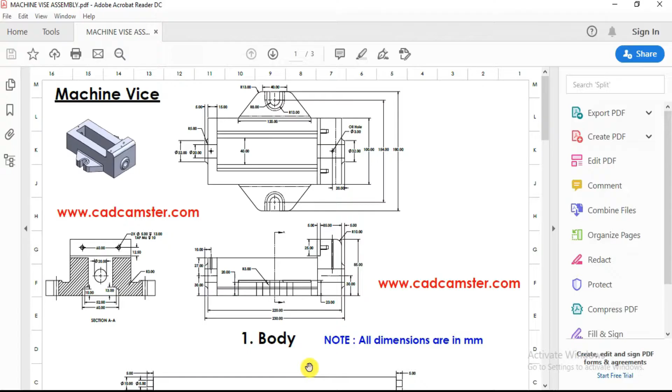Now first we will do some drawing reading. This is our first part, body, and this is the top view, and this is the front view, and this is the section view along this axis AA. First I'm going to start sketching from this front view, this profile, and I will extrude it up to a distance of 100 millimeters. Then I will make this cutout with the help of this section view at an offset distance of 15 mm up to this edge here.

After that I will create these holes, these fillets, these side flanges and these advanced holes with the help of the advanced hole tool in SolidWorks. And these two are the oil holes for lubrication. And there are threads. You can see tap thread of M6 up to a depth of 10 mm. So we will see how we can use the advanced hole command in this tutorial.

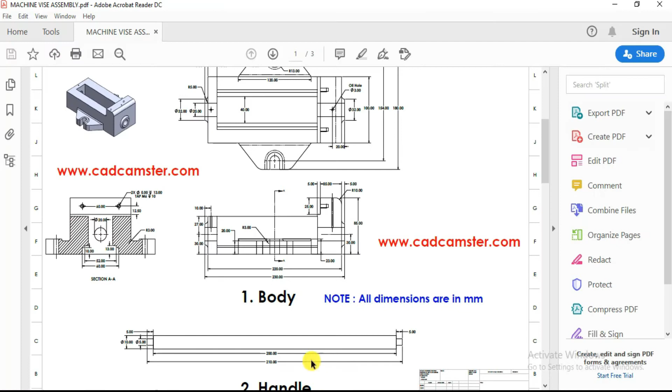Let me exit this assembly. Now go to File, select New. Now click Part, click OK. Now I will select units millimeter gram second and background plain white. Now first we will sketch our first part, which is body of the machine vise.

For that, let me hold on this front view. You can see all the dimensions very clearly. If you want to practice on your own, you can pause the video here and get all the dimensions. Now first I will select a plane to sketch. Select front plane and click normal. Now click sketch. Now select line command. You can also press the S key to get the shortcut line command.

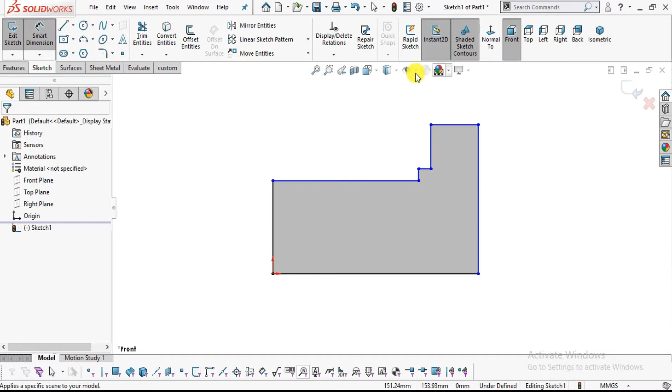Now I will sketch the profile, create one vertical line from here to here. Now one horizontal towards right. Now sketch this profile. Now vertical towards right and up to here. Now close this sketch like this. Now I will add some dimensions. Looks like it is not showing the constraints. Click here, view sketch relations. Now you can see all the constraints.

Now select smart dimension. This distance from here to here is 30 plus 27, which is 57. Select this edge, enter the value of 57 millimeters. This distance from top to bottom is 85 millimeters. Select this edge, enter 85 millimeters. This bottom base length is 220 millimeters. Select this edge, enter 220 millimeters, and from here to here it is 35.

Select this edge, enter the value of 35, and this edge length is 25 millimeters. Select this edge, enter 25. Now this edge here is 5 mm, so enter the value of 5 millimeters. Now click OK. Now you can see our sketch is fully defined.

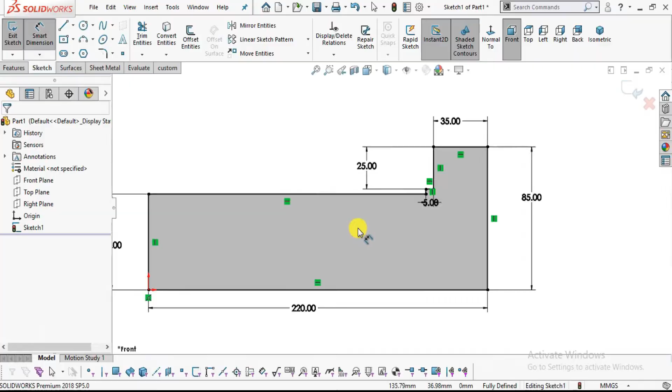Now I have to add one fillet here of radius 10 mm. Select the sketch fillet command, select these two edges, enter the value of 10 mm and click OK. Now we will use extrude command to extrude it, but make sure you extrude about the mid plane. So go to features tab, select extrude boss base and select mid plane.

Now, the extrude thickness can be seen from this top view. You can see here 100 mm is the thickness from here to here. Now enter the value of 100 millimeters. Now click here OK.

Like this. Now we have to make a cutout at an offset distance of 15 mm from this edge up to this edge. Now one more trick which I am going to tell you, which will be helpful for you to verify whether you are doing it in a wrong way or a right way, I mean your design approach. So you can use this hidden lines visible view to verify your approach or part at every stage.

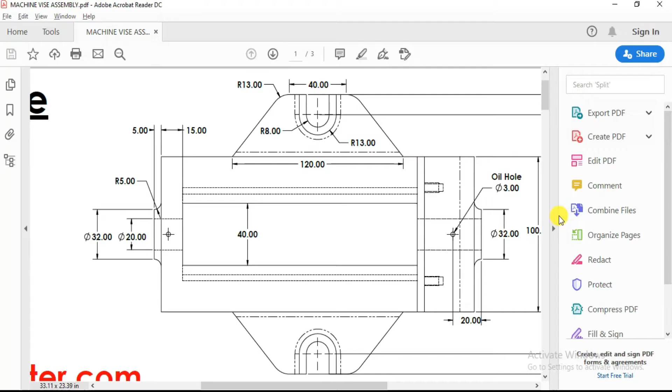Now you can see when I hover over my front view, we get the exact same profile which is shown here, which means you can double click on this and verify all your dimensions like this. Sorry, it will be 5. Yeah, it is 5. This is a very good way to approach your design. You can see like this. It is very helpful.

Now I will select this face, this one here, to make this cutout at an offset distance of 15 millimeters to this edge here. You can see this cutout is not beyond this edge, it is up to this edge. So for that I will select this edge, select this face and make it normal to.

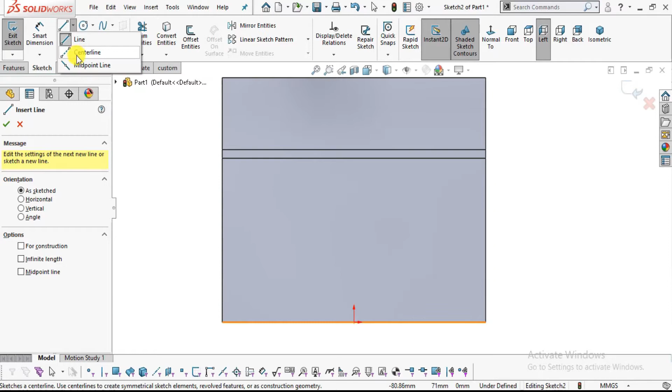Now select your sketch and select this face. Now I will sketch this profile here. For that select your line command. First create a center line. Now select your center line and create a center line at the mid portion like this. Now select the line command again. Now I will sketch this profile. You can see. Now create a line from here to here and up to this point, downward and towards the left, and like this.

Now I will assign some dimensions to it. Go to Smart Dimensions. You can see the full distance from here to here is 60. So from the center line it will be 30. Enter the value of 30 millimeters like this. And this height is 10 mm. Select this edge. Enter the value of 10 mm.

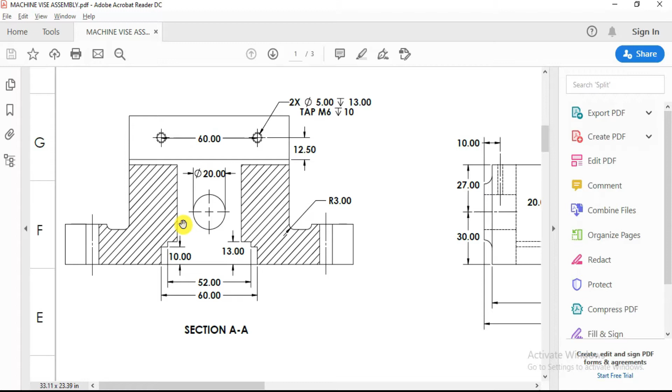And from here to here it is 13 mm. Like this. And this is 52 millimeters. So half will be 52 divided by 2, like this. Now we have to assign one more dimension, which is the gap of this portion.

For that let me go to the top view. You can see here the cutout gap thickness is 40 millimeters and it is at an offset distance from this plane which I am sketching on. So I will use an offset of 15 mm by extruding this sketch from this plane. And you can see this distance is 40 millimeters. So from center it will be 20. Now select this edge and the center line. This will be 20 millimeters.

Now if you want to assign these dimensions as diameter, let me delete this. You can do it another way. Suppose I know the whole distance is 40 millimeters and I want to dimension it as 40 millimeters. For that select this edge and select the center line and move your cursor towards the other side of the center line like this. Now you can see it is showing the whole distance, 40. Now you can set it as 40. This is a very good feature of SolidWorks.

Now I am going to mirror this profile along this center line axis. For that select mirror entities and select all these entities like this. Drag and select all these. Now the mirror axis will be this, and click OK. Now you can see.

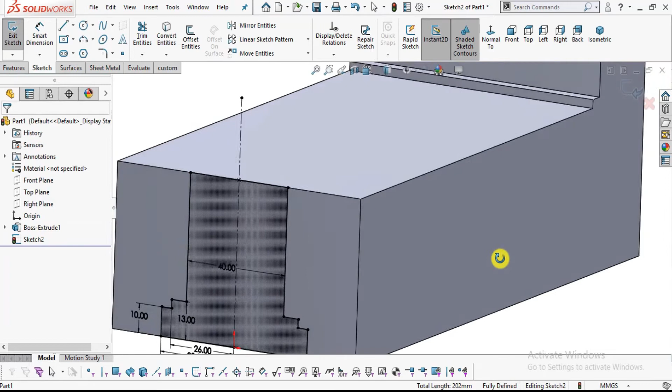Now I am going to use extrude cut, but I will enter an offset distance of 15 mm because you can see from this top view this cut is at an offset distance of 15 millimeters from this surface which I am sketching on.

Now go to features, select your extrude cut, and instead of selecting from sketch plane I will select offset and enter the value of 15 mm. Now direction will be opposite like this. You can see now our cut is starting from an offset of 15 mm from this surface, and select here up to vertex and select this edge.

Sorry, let me choose here blind and select here up to surface and select the surface like this. You can see the preview. Now click here OK. Now we have got our desired cut. You can see, as we wanted. Now we will create these holes,

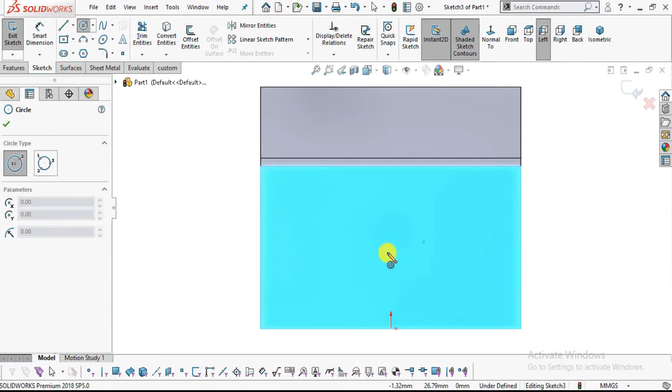extruded cylinders of thickness 5 mm, which is mentioned here. Now for that I will select this face again, normal to, and sketch. Now select a circle command, create a circle like this, and add one constraint. Select the center of the circle and hold down the control key and select this origin. Make them vertical.

Now you can see the center axis, and from the base it is 30 millimeters. So go to smart dimension and its dia is 32 millimeters, which can be seen from here. So select this circle, enter the value of 32 millimeters, and from base it is 30 millimeters. So select the center, select this origin, and enter the value of 30 millimeters like this. Now go to features.

Now I will extrude it up to a distance of 5 millimeters. Sorry, let me sketch one more circle. You can see 20 millimeters dia. Go to circle command, select this point, create a circle. Now enter the value of 20 millimeters dia, which is mentioned here like this.

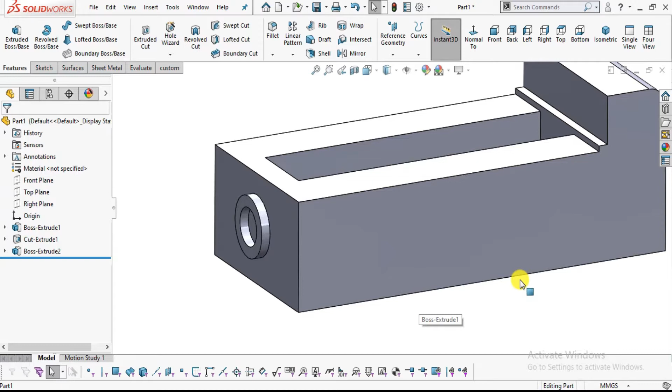Now go to features, select extrude, and enter the value of 5 millimeters like this, because here it is mentioned the thickness is 5 mm on both sides. Now click here OK. Now I will sketch on this plane. You can mirror it, but I will sketch.

Again, select your circle, create two circles. Now add one constraint, control select these 2 points, make them vertical, go to smart dimension, select this one, enter the value of 32 millimeters, and select this inner circle. Its dia is 20 millimeters, and the center distance from the base is 30, like this.

Now go to extrude, enter the value of 5 millimeters, and direction will be this left. Now click here OK. Now this is hollow, so I will expand this sketch and make this sketch visible. Now I will select here extrude cut, select this inner circle only, and select here through all both, because we want the cut through all the body. Now click here OK.

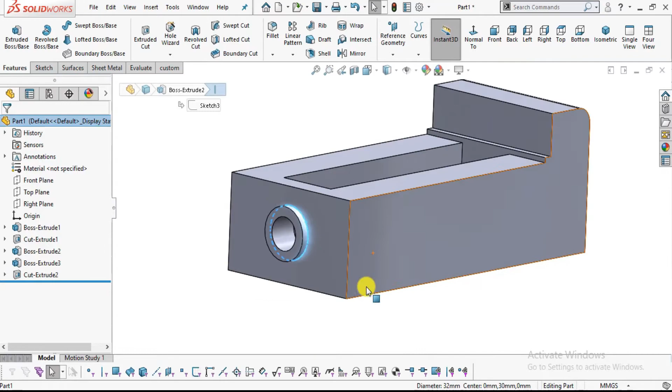Now let me hide this sketch like this. Now you can see this hole is through all length of this part. Now I will fillet these edges. Let me go through the drawing. You can see fillet is of radius 5 millimeters. Now go to fillet, enter the value of 5 mm. Now select these two edges, this one and this one, like this.

Now click here OK. Now you can see we have created these cylindrical extrudes of thickness 5 mm. Now I will create these two oil holes of dia 3 millimeters. Now I will select this face, normal to, and sketch, and sketch one circle here. Now go to smart dimension, select this circle, enter the dia of 3 mm like this. Now you can see it is at the mid.

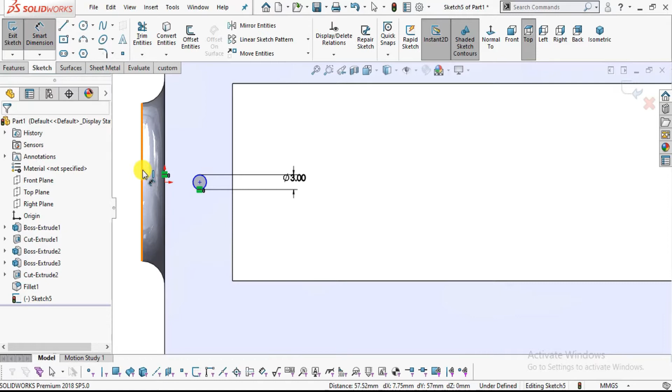So let me add one constraint. Select this origin point, hold down the control key and select this center point. Make them horizontal. And from this edge to the center line of this, it is 10 mm. Now go to Smart Dimension, select this edge, select the center point, and enter the value of 10 mm like this.

Now go to Features, select your Extrude Cut, and this cut is up to this cutout of the cylinder. Now I will simply drag it up so that it is through all this surface, this one. Now click here OK. Now you can see the cutout here.

Now I will sketch on this face, normal to and sketch. Now I will sketch this oil hole here, which is at a distance of 20 millimeters from the edge of this extruded cylindrical flange, and its dia is same. So select Circle command and create a circle. Go to Smart Dimension, select the circle, enter the value of 3 mm.

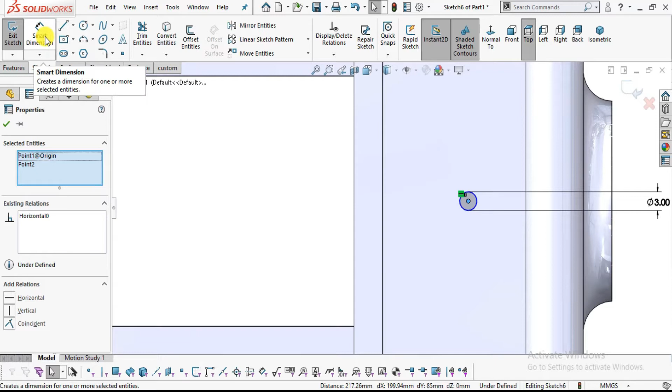Now make one relation. Let me exit the Smart Dimension command. Now select this origin and Control select this center point and make them horizontal. Now go to Smart Dimension, select the center point and select this edge. You can see the distance is 20 millimeters. Enter the value of 20 millimeters.

Now click here OK. Now go to Features, select here Extrude Cut, and in the same way I will simply drag this handle up to the mid portion of this cutout like this. Okay, you can see it is up to this. Now these are the oil holes.

Now in the next step I am going to create these 2 holes, which you can see are the tap holes, and I am going to create cosmetic threads in these tap holes of M6, meaning diameter is 6, and these have internal threads.

So let me go to the part. Now select this face and normal to it like this. Now select here hole wizard. Now select here straight tap. Now standard will be ANSI Metric and type will be tapped hole.

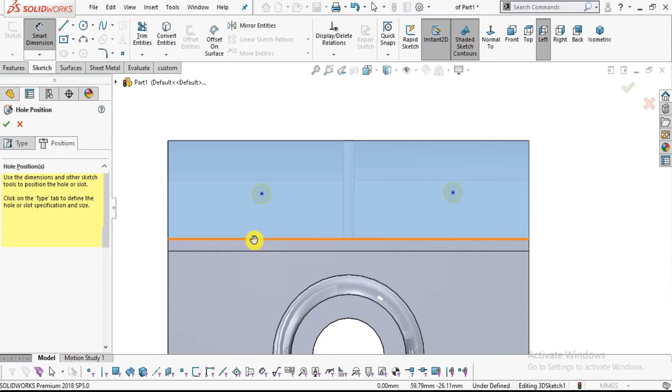Let me zoom in. You can see center distance from this edge is 12.5 millimeters. So select this edge, center point, and select this edge. This distance is 12.5. Same as here. Select the center point, select this edge. This will be 12.5.

Now center to center distance is 60 millimeters. Select these 2 centers, enter the value of 60 mm like this. Now this whole distance is, you can see, 100 mm. So from here to here it is 20. Equidistance like this. Now this will be automatically 20. Now I will click here OK.

Now you can see this is a dotted circular line. This is a symbol of cosmetic thread. Now it is not showing cosmetic thread because in the settings it is turned off. Now go to settings, document properties and detailing. Now select here shaded cosmetic threads, click here OK. Now you can see it is showing the thread.

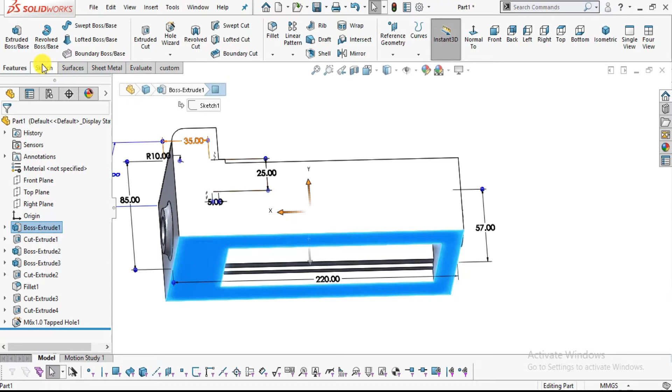Now in the next step I am going to create these flanges. I will create only one flange and mirror it to another side. Now for that, select this face and sketch on this face, but I will view from this top face. Now select this top face as normal like this.

Now create one center line. Let me snap it. You can simply create line, select line command, and first select here circle command and create one inner circle of dia 16 mm because radius is 8 mm like this, and dimension it 16 mm.

Now select a line command and create one vertical line. Again select a line command like this. Now select a line command again and sketch like this. Later on I will add the fillets. Close this sketch like this.

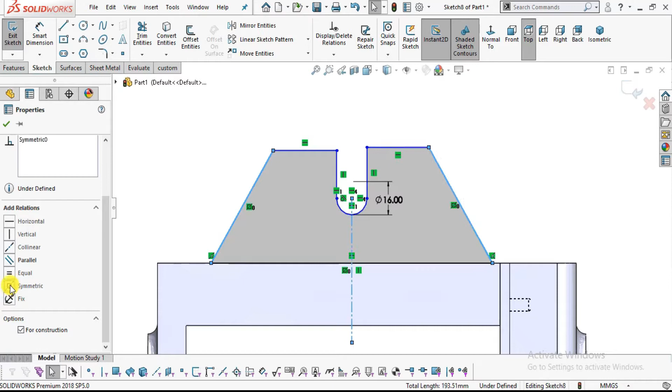Now create one center line from this center in the downward direction like this. Now go to trim entities and trim this portion. Now I want these lines to be symmetric, so select this line, control select these two lines and make them symmetric like this, and again select these three lines, control select these three lines and make them symmetric so that it don't move.

Now I will dimension it. You can see there is a fillet. Now I will add here fillets. Enter the value of 13 mm radius because here the radius is 13 millimeters, and select this edge, this corner and this corner and click here OK.

Now I will assign some dimension. Go to smart dimension. From here to here it is 40 millimeters where these arc ends, and the value of 40 millimeters like this, and this whole distance is 120 millimeters, and from here to here it will be automatically 60 because I have added one symmetrical relationship.

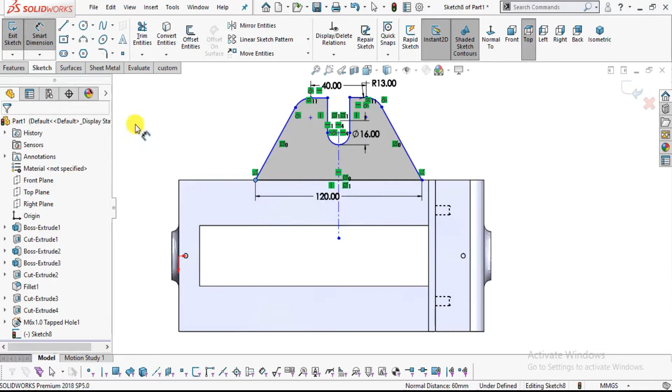Now you can see from center to this center it is 154. So from this origin or mid axis it will be 154 divided by 2, same as here the top edges are at 180 millimeters apart, so the mid axis or the origin axis it will be 90 millimeter apart. So select this center point and select this origin point which is at the mid of this. Let me select it again. Select these 2 points. Now this will be 154 divided by 2.

Now select this edge. Let me make these two collinear, vertical, horizontal, so that they don't move. Now select this edge and select this origin point, and this will be 180 divided by 2. Enter the value of 180 divided by 2 like this.

You can see this whole distance is 230 millimeters, and this center circle will be at the mid. So go to smart dimension, select this edge and select this center point. Enter the value of 230 divided by 2 like this. Now you can see the preview.

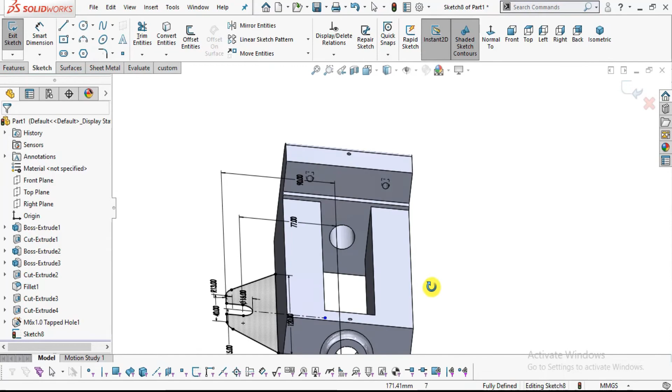Now we'll extrude it to a thickness of 20 millimeters from the front view. Go to feature, select extrude boss base. Direction will be opposite and thickness will be 20. Now click OK.

Now select this face again and sketch. Select offset entities. First select convert entities and convert these edges into a sketch. Let me select this edge. You can see. Now go to offset entities.

You can see the radius of the outer one is 13, so this thickness for offset is 5 mm, 13 minus 8. Enter the value of 5 mm and select these edges. You can see it has automatically selected all of them because I have checked select chain. Now click OK.

I will close these edges. Select the line command and connect these two points with a line. Now go to feature, select extrude boss base and select this region. Drag this point to here to make them coincident. Now you can see it is shaded, meaning this is a closed sketch now.

Now go to extrude, select this profile. It is automatically selected. Now its thickness is 3 mm because from here to here it is 20 and this is 23, so its thickness is 3 mm.

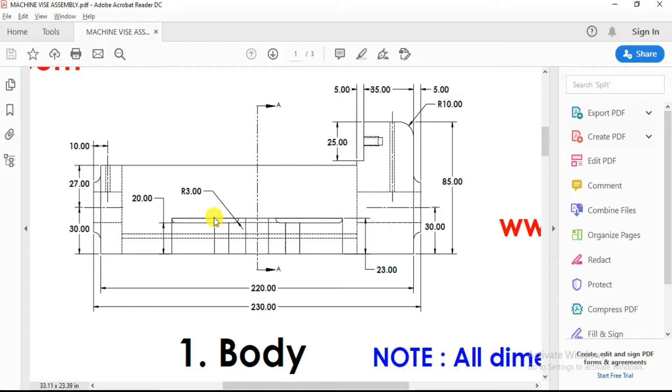Now click OK. Now there is a fillet on these two edges, this one and this one. You can see the fillet is 3 mm at this edge. Now go to fillet, select this edge and enter the value of 3 mm.

Now click OK. Again go to fillet. You can see there is a fillet of 3 mm here also. Now select this edge and make sure you select tangent propagation so that it selects all the edges tangent to the selected edge.

Now click OK. Now we will mirror this profile along this front plane. Select mirror. I will select this extrude, this fillet, this one and this one. You can see it is showing the preview. Now click here.

Unable to create instances. So let me first select the base, this one and this one. Now I will fillet these two, both of them are 3 mm. Now click OK. You can see we have successfully created our first part, which is the body.

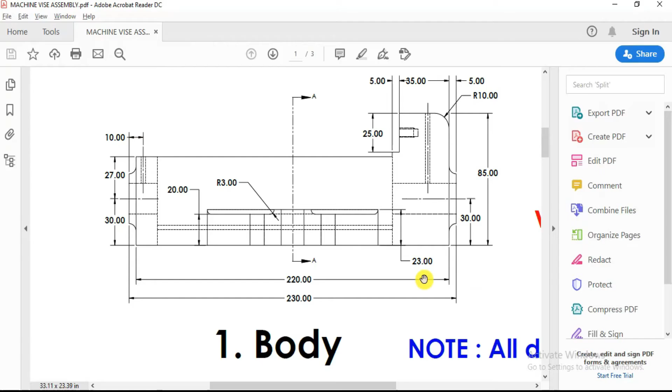In the next step we will create our second part, which is this handle. You can see the drawing of our second part is here.

Now there are two ways to create this part. Either you can use the extrude command with several step extrudes to create this profile, or you can simply create this half profile along the mid axis and then use the revolve command to create the whole profile. Now I'm going to use the second approach using the revolve command.

First I'm going to create a construction line, a horizontal construction line of length 210 millimeters. Then I will create this half profile and use the revolve command, and our revolve axis will be that center line which we have created of length 210 millimeters.

Now let's get back to the software screen. Go to file, select new. Select part and OK. Now select millimeter gram second and select this background to plain white.

Now select this front plane, normal to, and sketch. Select center line and create a center line of length 210 millimeters. Now go to Smart Dimension, select this center line and enter the value of 210 millimeters.

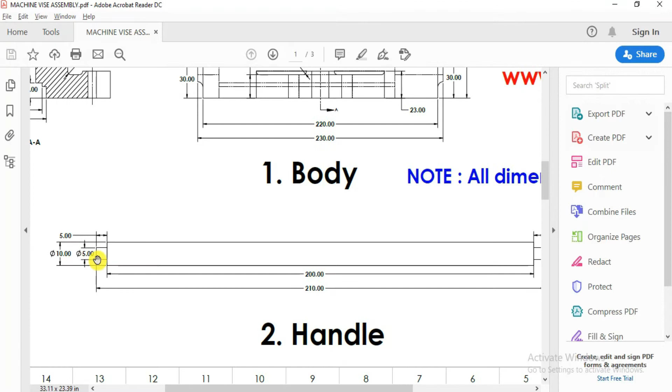Now we have to create this half profile. First we will move 2.5 mm upward, then 5 mm towards right, then 2.5 mm upward again, then 200 mm up to here, then 2.5 mm downward, then 5 mm towards right, then 2.5 mm downward.

So let's sketch this. Select the line command, create a vertical line in upward direction of length 2.5 mm since the hole is 5 mm so half will be 2.5 mm, then 5 mm towards right, again 2.5 mm, now 200 mm like this, then these two will be collinear or horizontal. Sorry, let me select it again.

Like this. Now I will add some constraints. Select this line and make them horizontal. Or you can simply select these 2 points and make them horizontal like this so that they don't move.

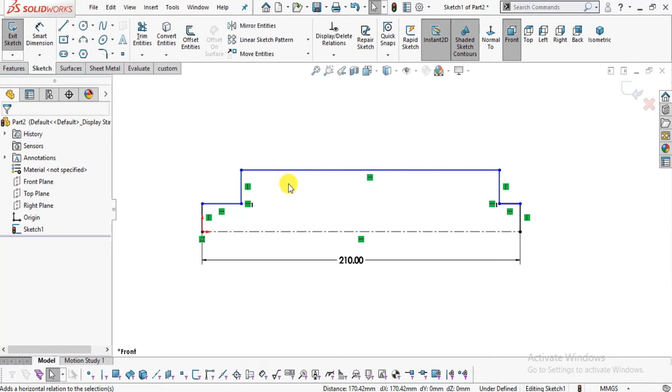Now I will assign some dimensions. Go to Smart Dimensions. Now select this. You can see its whole diameter is 5 mm. So half will be 5 divided by 2, which is 2.5 mm. So this edge length will be 2.5 millimeters like this, and this will be 5 mm here.

Select this edge, enter the value of 5 mm like this. Now this will be 200 from here to here. Select this edge, enter the value of 200 millimeters like this. Again select this one, this will be 2.5 millimeters like this. Now you can see our sketch is fully defined.

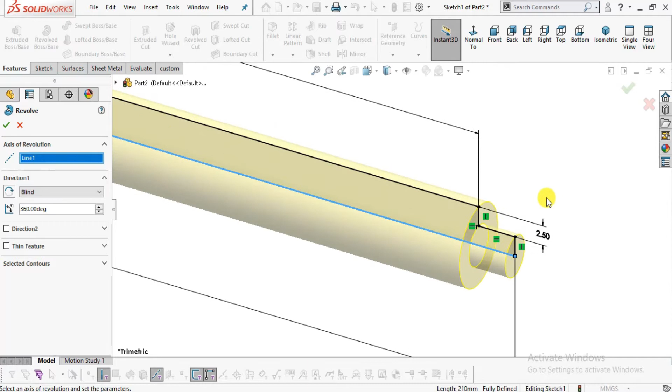Now we will use the revolve command, but before using it, select this center line and uncheck construction geometry, because when you use revolve command it will show open geometry otherwise. Now select here revolve command. Now select this axis like this. You can see it is showing the preview. Now click OK. This is our second part, handle.

Now in the next step we will create our third part. Our third part is jaw. We will create it in the next step. Now we will create our third part, which is jaw. This is the drawing of our third part, jaw.

First I will create this rectangle of length 100 mm and width and height 28 mm. Then I will extrude it up to a thickness of 8 mm. Then you can see here there are two holes which are actually countersunk holes. This symbol of V shows that these holes are countersunk, and the outer hole is of diameter 12 mm and the inner one is 6.3 millimeters, and these two holes go through all this thickness.

So first I will select here part, new, and OK. Now select here millimeter gram second and plain white. Now select here front plane, normal to, and sketch. Now select your center rectangle, snap this point, origin point, and create a rectangle.

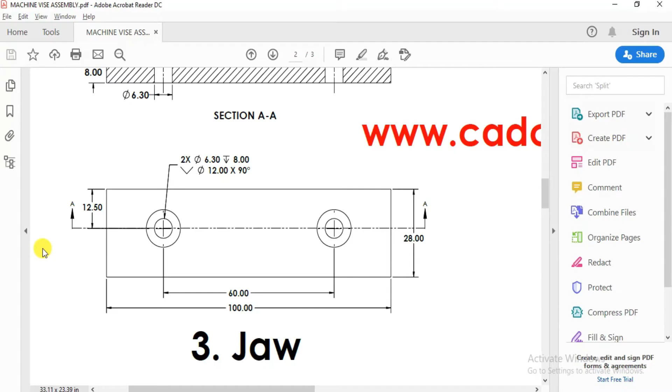Now I have to assign dimensions. You can see this 20 mm diameter is this diameter, but we have this diameter as 6.3. Enter the value of 6.3. Depth will be hole 8 mm and angle is 90 degree. Enter the value of 90 degree and double click on this diameter. Countersink diameter is 12 mm.

Now go to positions, select 3D sketch and create 2 like this. Now go to Smart Dimension. Now you can see center to center distance is 60. And from this side this hole is 100 and this is 60, meaning from here to left it is 20. So this will be automatically 20.

And from base it is 28 divided by 2 because it is at the middle. Or you can see here, sorry, it is not at the middle, it is 12.5 mm from the top, which is mentioned here. Select these center and these. Enter the value of 12.5. Now select the center point and select this top edge. Enter the value of 12.5 like this.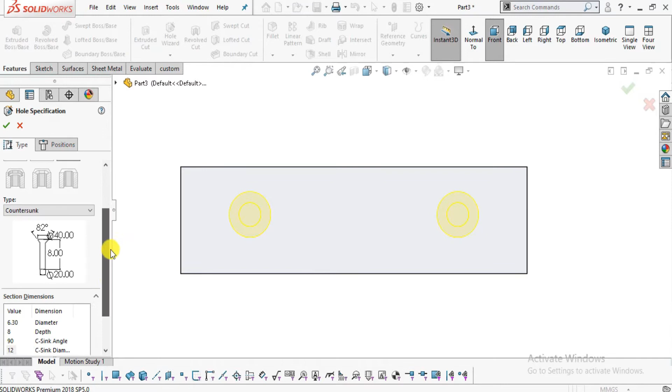Let me verify these dimensions again. Yes. Now click here OK. Now you can see we have created this.

Now if you want to verify, you can select this top plane and section view. Now you can see it is exactly same as this section view. Now let me exit the section view. Now this is our third part. Save it, which is jaw.

In the next step we will create our next part, which is movable jaw, this one. Now we will design our next part, which is part number 4, movable jaw. Now this is the drawing of our part number 4.

You can see this is the front view, this is the side view, and this is the bottom view, not the top view. And you can see there are threads, tap threads into these two holes, this one, and these two bottom ones. All the dimensions are mentioned here.

Now we will start creating from this front view. We will first create this front view, then we will create these fillets, or you can say we will create this sketch and use extrude cut to make this profile, and at last we will create these holes. So let's get started.

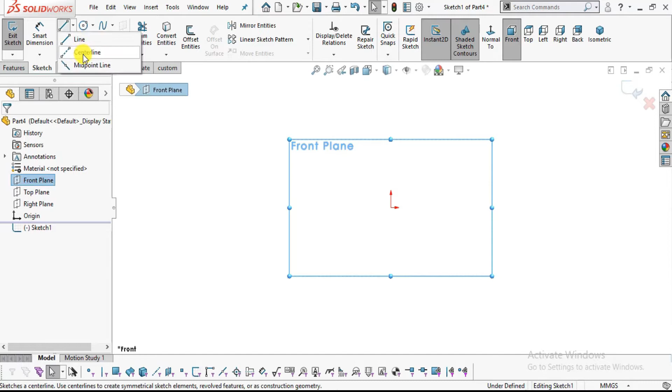Go to file, select new, select part and OK. Now select millimeter gram second and select plain white. Now select front plane, click normal to and sketch. Now select center line. I will create only half profile, the other half I will mirror.

Now create a center line like this. Now the length of the center line will be 25 plus 3 mm, which is 28, plus 45. This whole length will be 28 plus 45. Go to smart dimension, select the center line. This will be 28 plus 45, 73.

Now go to line command and create this half T profile like this. Now go to smart dimension. Now this one will be 25 because the whole distance is 50. If you want to dimension it by 50, you can also do that. For that, let me delete this.

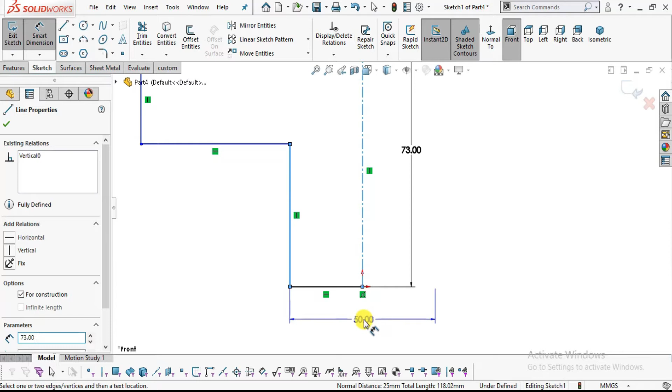Now go to smart dimension, select this edge and move your cursor towards the other side of the center line like this. You can see it is showing the whole distance. This will be 50. Now this distance will also be 50. From here it will be 50, but I want it to show the whole distance, 100, like this.

Now this distance will be 30 because this whole distance is 100 and this is 40. So the sum of these two will be 60, so each of them will be 30 millimeters. Now select this one. Sorry, this height. Sorry, this is not 50, this is 40 like this, because its extrude distance will be 50 mm.

Now this height will be 45 from here to here. Now select this one and this one. This will be 45 like this. Now go to mirror command and drag and select these entities like this. Now select the mirror axis like this.

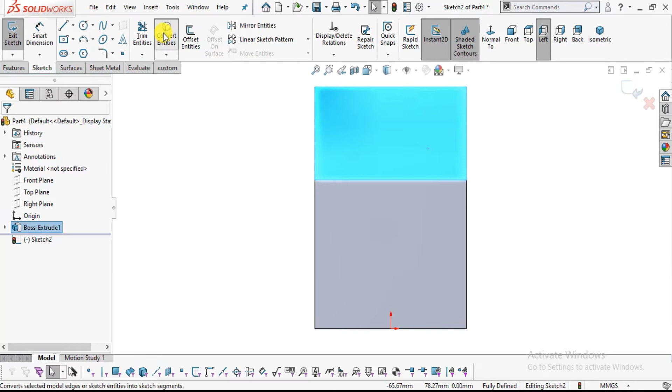For that I will sketch on this face. Select this face, normal to and sketch. Now select this face again and convert entities like this. Now select your line command and create a profile like this. You can see this is our profile. I have to create one more profile like this.

Now select your fillet and create two fillets here and here. Here it is 3 mm and here it is of radius 10 mm. So enter the value of 3 mm, select this corner, and select this corner, enter the value of 10 mm and select these two corners like this. Sorry, let me delete this relation. Now I will fillet it later. Now I will assign some dimensions.

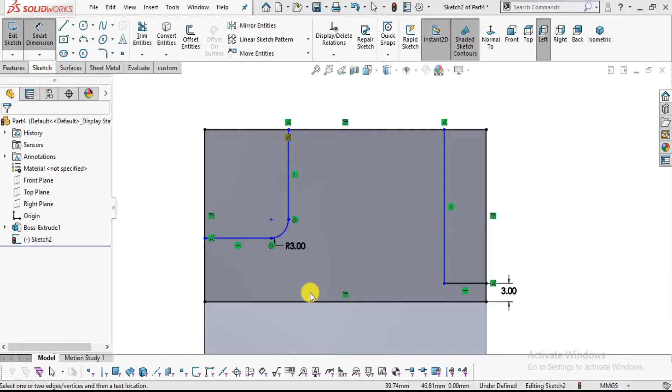Go to smart dimension. Here you can see it is 10 mm from this edge. This will be 3. Select these two edges, this will be 3 mm. Now from here to this edge, this will be 10 mm. And from this to this edge, this will be 25.

Now from here to this edge, this will be 35. Enter the value of 35 like this. Let me drag this like this. Now this will be 5 mm. Go to smart dimension, enter the value of 5 mm. Now go to features, select extrude cut, select these two regions, select through all both and click OK.

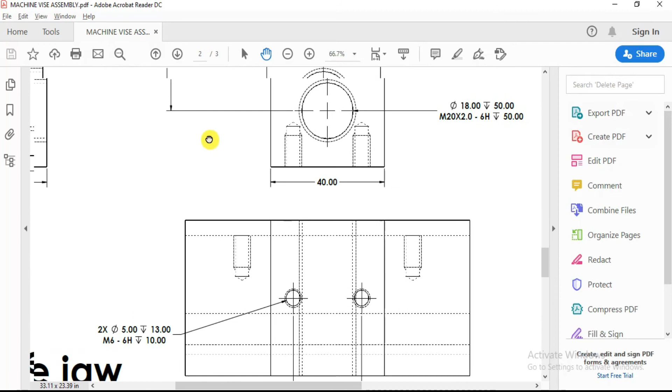Now you can see we have to make one more fillet. Go to fillet, enter the value of 10 mm and select this edge like this. Now if we switch back to normal to this view, you can see this is our required profile of the side view. Now we have to create some holes. For that, first I will create these internal threads. Select this face, normal to, and you can create a hole.

Now first we will create this hole of 18 mm dia up to 50 mm, and 6H is the tolerance of the fit. Now select hole wizard and select legacy hole and simple hole. Now enter the depth value of 50 mm and the diameter will be 18. Double click, edit and enter the value of 18 mm. Now go to position, select 3D sketch and position it like this.

Now smart dimension. From this edge up to this center, this will be 20 because the whole distance is 40. Now from this edge it is 27. Select this center and this edge, this will be 27 like this. Now click OK. You can see. Now select thread.

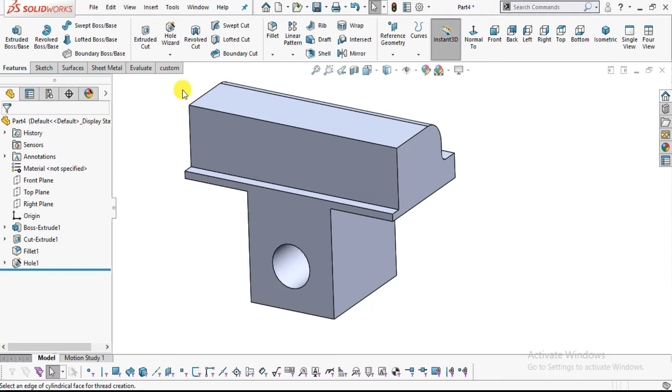Now thread location will be this edge, and starting face will be, let me select this face, and it will be blind, or enter the value of 50 mm like this. Now select here

metric tab, and thread type will be, size will be M20 x 2, which is mentioned in the drawing. You can see the preview like this, and select your right hand side thread and click here OK. Now we have created the thread.

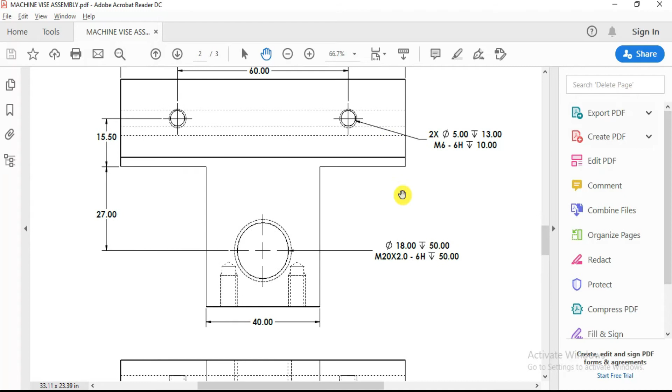Now I will create these holes, but in these holes there is also a thread, but I am not going to use the actual cut thread. For these holes I am going to use the cosmetic thread. Now select this face and normal to. Now go to here hole wizard and select here straight tap. Now select here ISO metric tap hole.

Now we have to specify the size of the hole. You can see the size is M6. Select here M6 and pitch will be 1 mm. Now it is asking for the hole depth. You can see this hole depth is 13 mm and the thread depth is 10 mm. So this will be 13 and this will be 10.

Now select here cosmetic thread and uncheck this near side countersink and check here with thread callout. Now go to position, select 3D sketch and position them. Now we have to specify the location. Go to smart dimension. You can see from this edge here, this is 15.5 like this. Again select this center, select this edge. This will be 15.5.

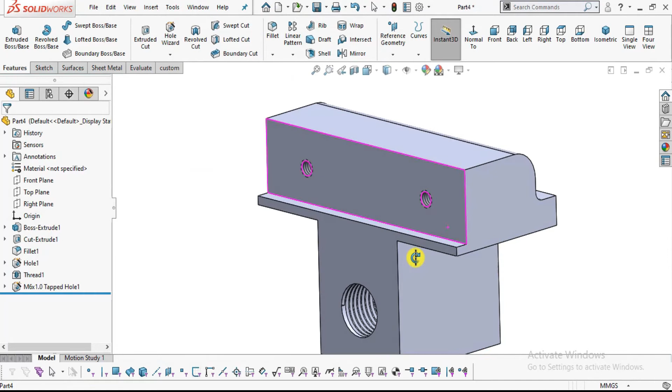Now let me do some settings so that we can see the cosmetic thread. Now click here shaded cosmetic. Now you can see the thread here, cosmetic thread. Now in the same way we have to create holes at the bottom. Normal to.

Now go to again hole wizard, select here straight tap and ISO metric tapped hole, and size will be the same M6, and dimensions all of them are same. Sorry, this hole depth will be 13 and this will be 10. Looks like in the previous one I have entered 15. First I will get this one, then later on I will check the previous one. Now these are the end conditions. Uncheck this thread class. Now select your position, 3D sketch and position them like this.

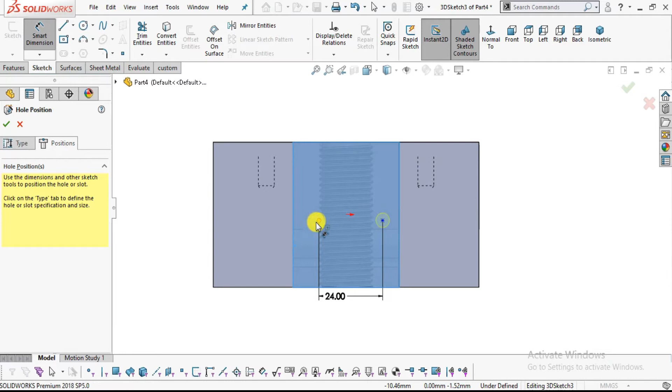Now go to smart dimension. From center to center it is 24 and hole distance is here 40. So from here to this one, it will be 8 mm from these two edges. Select this edge and this one, this will be 8 mm. So this will be automatically 8 mm.

Now we have to specify from the top edge or bottom edge. Now you can see this will be 50, so it will be at the middle. So from top edge this will be 25. Again select this top edge, sorry, let me edit this. Go to smart dimension, select this one and this one. Looks like it is not snapping the top edge, it is snapping it in a wrong way. Snap this 25. Now it is fully defined.

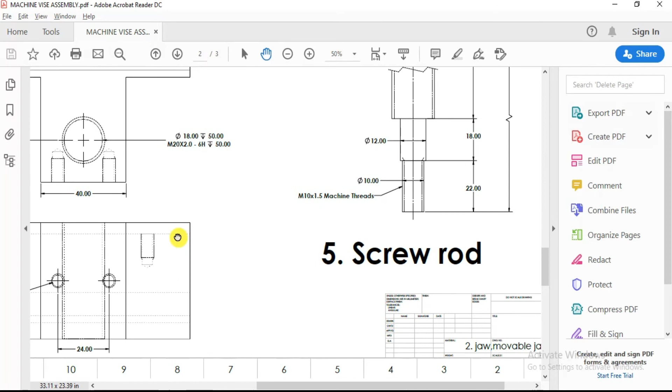Now click here OK. You can see our threads are made, cosmetic threads. Now this fourth part, movable jaw, is ready. Now in the next step we will create our next part, which is this screw rod.

Now we will draw our next part, which is part number 5, screw rod, with the help of this drawing. You can use two approaches. You can either use extrude command or you can use revolve command. I am going to use extrude command. So let's get started. First select here file, select here part and click here OK. Now select here millimeter gram second and set background to plain white.

Now select here sketch and front plane to sketch and sketch circles. Let me check this option, sketch numeric input. Now what will this do?

Now you can see when I make this option visible, now if I draw anything, you can see boxes appear. So this helps the user to enter the value dynamically while sketching. So it saves a lot of time

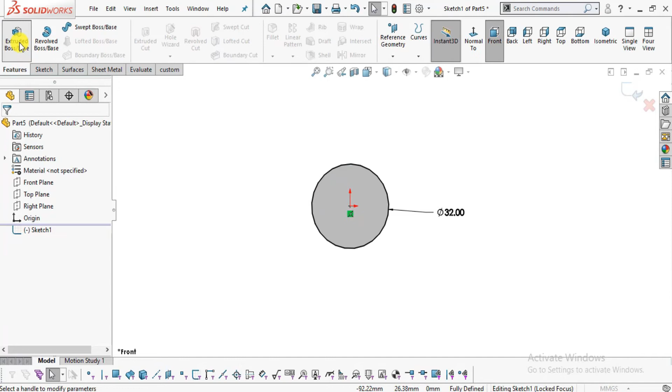of dimensioning the sketches. Now go to circle command, select circle, snap this point and create a circle of diameter 32 mm and extrude it up to a distance of 40 mm. Now enter the value of 32 mm like this. Now go to feature, select extrude and extrude up to 40 millimeters like this.

Now select this face again, normal to and sketch, select circle command again. Now create a circle of dia 20 millimeters and extrude up to a distance of, you can see, 170 plus 40, 210 mm. Go to feature, select extrude and enter the value of 40 plus 170, 210 mm. Now click here OK.

Now again select this face, sketch, select circle command and create a circle of dia 12 mm and extrude it up to a distance of 18 millimeters. Now enter the value of 12 mm. Now go to feature, select here extrude boss base and enter the value of 18 millimeters like this.

Now again select this face, sketch, circle command. Now the dia will be 10 mm and the extrude depth will be 22 mm. Diameter is 10, enter the value of 10 mm. Now go to features, select here extrude boss base and enter the value of 22 millimeters like this. Now click here OK.

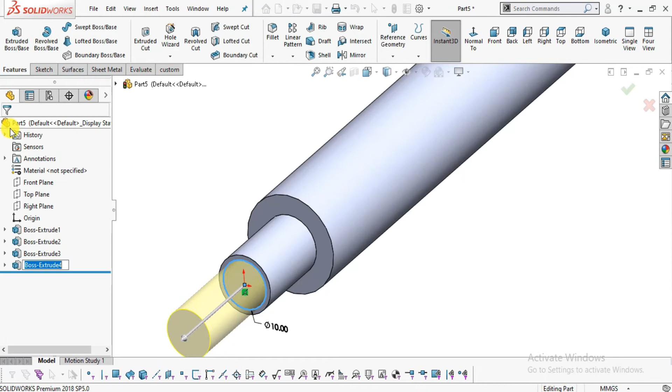Now we will create one fillet on this edge of radius 3 mm. Now go to fillet, select this edge and enter the value of 3 mm like this. Now you can see this is the mid plane. Now I will sketch on this plane. Now normal to and sketch. Now select circle command and create a circle of dia 10 mm. Enter the value of 10 mm like this.

Now add one constraint. Select the center point of the circle and hold down the control key and select this origin point and make them vertical. Now go to smart dimension. From this edge it is 20. Select this center point and select this edge, and this will be 20.

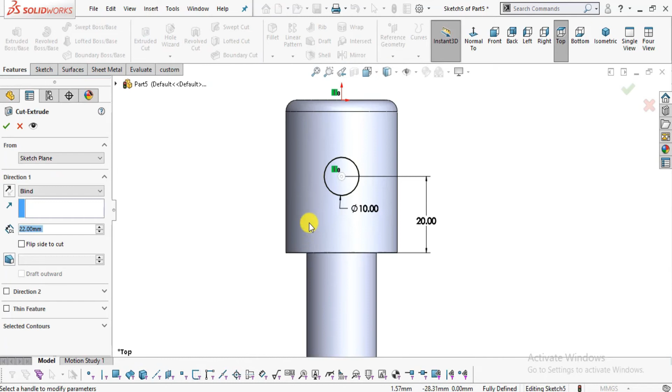Now go to features, select here extrude cut. Now select here through all both. Now click here OK. You can see we have got the cut through all which is mentioned here. Now we have to create these two threads of M20 dia and pitch 2 mm and here M10 of pitch 1.5 mm.

Now for that select here thread. Now first select this edge. Now we have to specify the end condition which is the 22 mm length. We want thread up to 22 mm. Now we have to specify the starting face, which will be this face. Now we have to select the metric type. For internal threads we use tap and for external or male threads we use metric die. Now you can see we have selected metric die.

Now we have to specify the size of the thread. Now you can see here the size is M10 1.5. Now select here M10 1.5 like this. It is calculating. Now you can see the preview M10 1.5. Now select here cut thread and right hand thread. Now click here OK. You can see this is our cut thread.

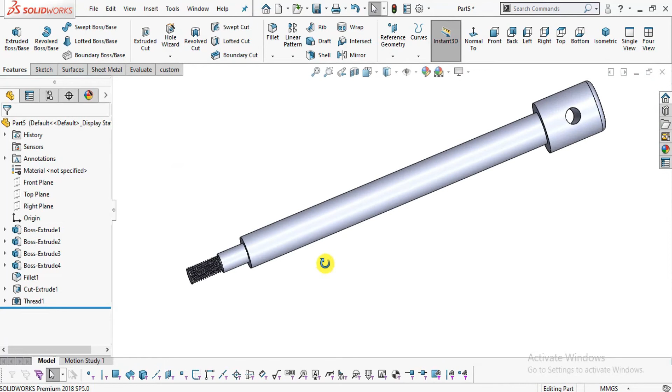Now again we will select this thread command. Now I will select this edge and this face as a starting face. Now we have to specify the end condition. Now we have to go back to the drawing. You can see we have selected this edge and our thread is up to only this 170 mm. So I will enter the value of 170 like this.

Now we have to specify metric die. Okay, it is okay. Now we have to specify the size, which will be M20 and 2 mm is the pitch like this. Now select cut thread. Now click here OK. Now you can see this is our fine thread.

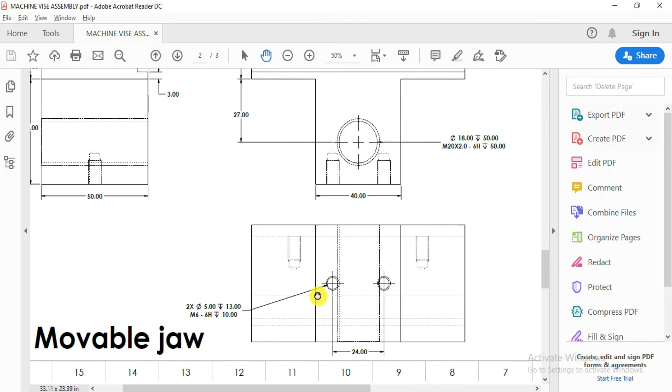In this way we can create our part number 5 which is a screw rod. In the next step we will create our part number 6, and our part number 6 is this washer. Now we will design our next part which is washer, part number 6, and this is a drawing of our next part, washer.

Now select here file, select here new and click here OK. Now let me choose the background to plain white. Now select here front plane to sketch and click here normal to. Now select here sketch and create two circles of dia 10.5 and 32 millimeters and then extrude them up to a thickness of 6 mm. Create two circles, enter the value of 10.5 and again select this point and create another circle of 32.

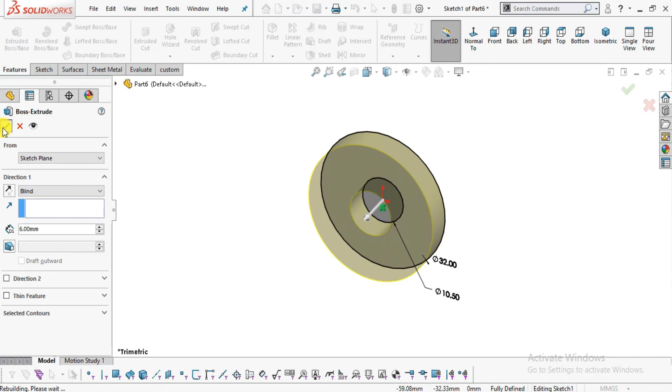You can see. Now go to feature, select here extrude boss base and enter the thickness value 6 mm. Enter the value of 6 mm like this and click here OK. This is our next part number 6, washer. In the next step we will design our part number 7, which is this clamping plate.

Now we will design our part number 7, which is clamping plate. First I am going to create this square of 50 by 50 mm. Then I will extrude it up to a distance of 8 millimeters.

Here it is given. Now these are the hole callouts, and you can see this is a countersunk type hole. The whole outer one here, the diameter of hole is 12 mm, and here at the countersunk neck the dia is 6.3 mm, and this is through all this thickness 8 mm. Now let's create this our part number 7.

Go to file, select here new, select part, click here OK. Now select here millimeter gram second and select here plain white. Now select here front plane, sketch and normal to. Now select here center rectangle, create a rectangle of dimension 50, enter the value of 50, press the tab key, enter the value of 50. You can see.

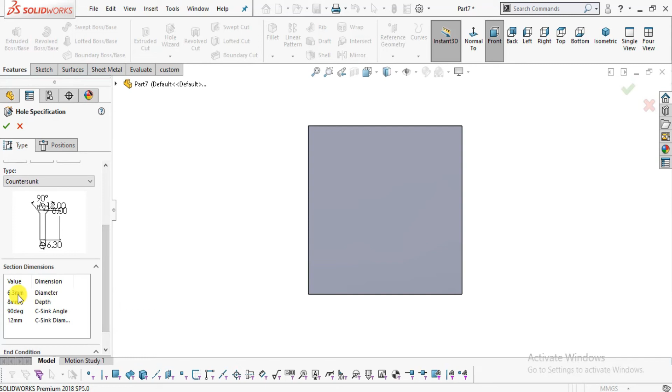Now go to features, select here extrude, enter the thickness of 8 millimeters. Now click here OK. Now select this face and normal to. Now select here hole wizard, select here legacy hole and select here countersunk. Now we have to edit the dimensions. Double click on these dimensions to edit them. Now you can see.

Let me zoom in. This dimension dia will be the dia below, which is 6.3. Hole depth is 8 mm. This one is 90 degree angle and this one is 12 mm. All these dimensions are correct, so I will not edit them. Now go to position, select 3D sketch. Now I will specify the positions. Select these two positions like this.

Now go to smart dimension, select this edge and this center. This will be 25. Again select this edge and this center. This will be 25 millimeters like this. Now we have to specify the center to center distance and distance of any one center from these two edges. Now center to center is 24 and from this edge it is 13.

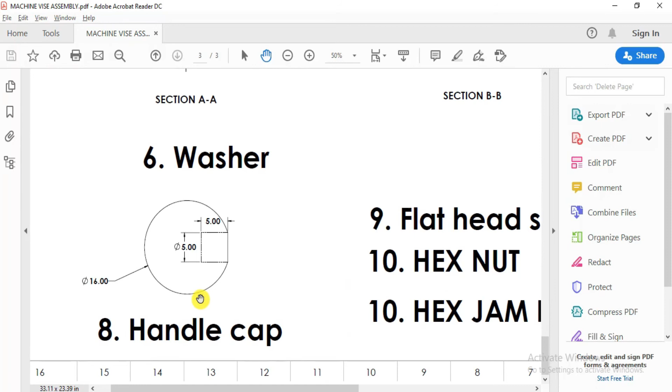Now select these two centers. This is 24. Now select the center, select this one. This is 13. Now click here OK. You can see we have created our part number 7, which is clamping plate. In the next step we will create our next part, which is part number 8, handle cap.

Now we will design our next part, which is part number 8, handle cap. And this is the drawing of our part number 8, handle cap. So let's design it. Now select your file, select your new, select part, click here OK. Now select your millimeter gram second and switch to plain white background. Now select front plane, normal to, and click here sketch.

Now create one center line like this. Now select here 3-point arc and create arc from here to here like this. Now I will assign some dimensions. You can see its outer dia is 16 mm. Go to smart dimension. This will be 16 mm. Now its radius will be 8 like this. Now select here revolve boss base. Now click here yes and OK.

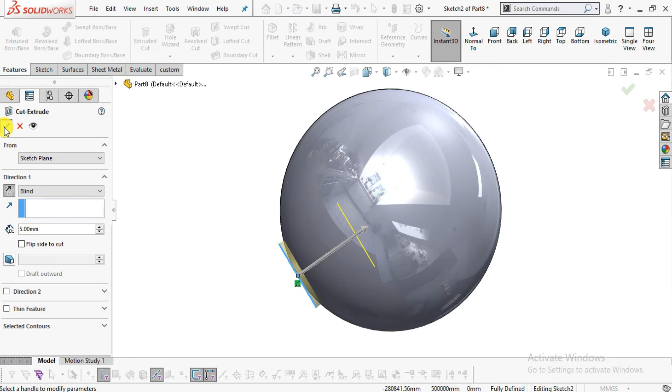Now select this top plane and normal to and sketch. Now sketch a circle of dia 5 mm. Enter the value of 5 mm. Now go to feature, select here extrude cut. Now you can see the direction will be opposite and the depth will be 5 mm here. Enter the value of 5 millimeters like this. Now click here OK. You can see this is our handle cap.

In the next step we will assemble all these parts, and these 3 parts we will import from the design library while in the assembly mode. Now we will assemble all the parts which we have created earlier. For that, select your file, select your new, select assembly. Now click here OK. Let me select here background to plain white and millimeter gram second system.

Now first we will import our first body, which is our base body like this. Now make this body fixed. It is automatically fixed. You can see because here float option is showing, means our body is automatically fixed. It cannot be rotated. Now we will import our second part, this movable jaw.

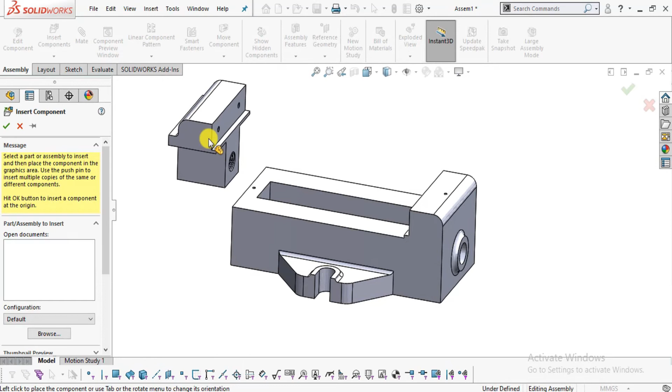Now select this face, select your mate and select this face. You can see, and make them coincident. Click here coincident or here this pop-up mate bar. Now select this edge and this circle. Make them, sorry, let me delete this one, and looks like I haven't selected proper edge.

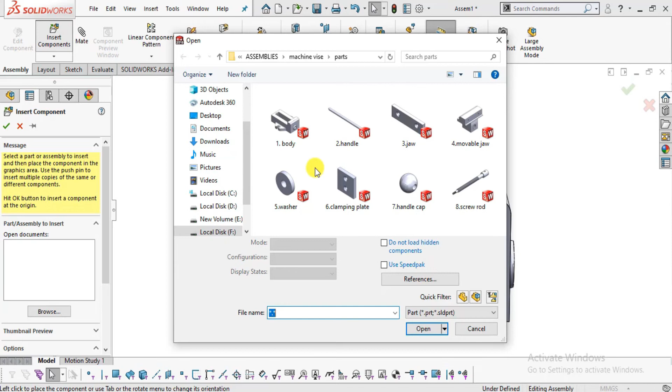Now select this edge, select your mate and select this edge or this cutout, cylindrical cutout, and make them concentric relation. Now click here OK. Now you can see our part can move inside this cutout like this. Now select here insert component, insert this washer like this.

Now select this edge, select your mate and select this edge like this. Now select this face and select this face and make them coincident. Now click here OK. Now we will insert some more components. Click here, insert components, and insert this jaw plate like this. Now select here, rotate, and select this plate like this.

Now go to assembly, select here mate, and select this cutout and this cutout. Direction will be, let me uncheck these and rotate this part like this. Now select here mate, select this cutout and this edge and make them concentric. Now again select this cutout and this one like this.

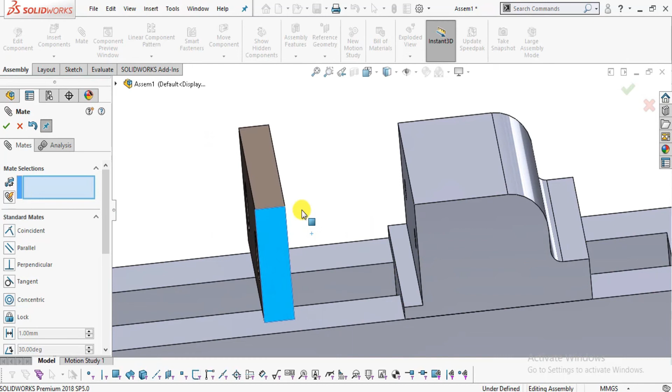Now you can see, now we have to add one more constraint. I will select this face and this face and mate them using coincident mate. Now click here OK. You can see both of them are concentric to these holes, countersunk holes. Now I will select this part and right click and select here copy with mates.

Now it is asking for the concentric relation. Now first I will select this one, and the second relation I want with this one, and I want to mate it with this one. Now click here OK. Looks like it is mated in reverse direction, so let me select this and delete this. I will manually do it.

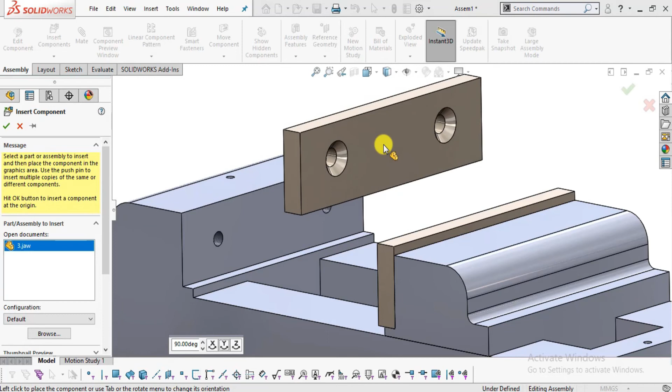Insert components, select this jaw and rotate it like this. Let me select this cutout, select your mate, select this cutout, make them concentric. Now drag this like this. Now select this one and this cutout like this. Sorry, it is reversed. Let me delete its mate.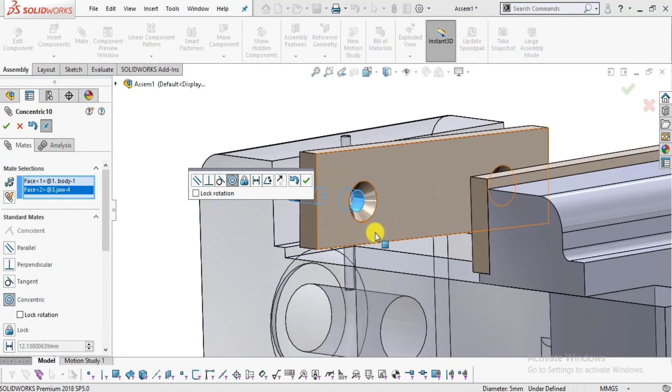Now we will rotate it because it is in the reverse direction. Now select your rotate like this. Now click here OK. Now select your mate. Now select this cutout and this cylindrical cutout and make them concentric. Again in the same way, select here this cutout and this one. Make them concentric relation and click here OK.

Now select this face and this face and mate them using coincident mate. Now click here OK. You can see we have assembled both these jaw and the moving jaw. Now in the next step we will insert some other components.

This clamping plate, now rotate it like this. Now rotate this model like this. Now select this. Now select mate command and select this cutout like this, and any of these two cutouts inside edge. Now make them concentric. Click here OK.

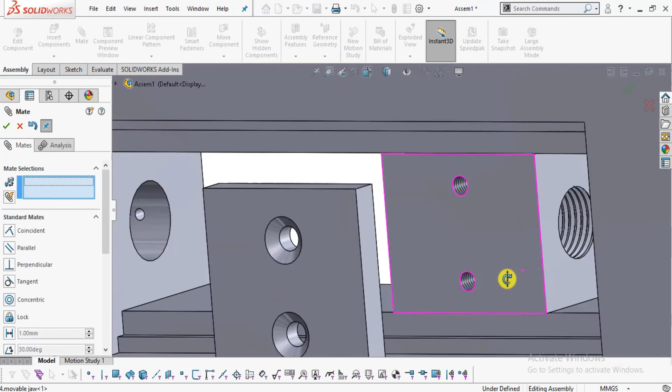Now again you can see, now I have to select this one and this cutout. Now click, make them concentric. Now select these two faces and make the coincident relationship. Click here coincident and OK. You can see our clamping plate is assembled with this moving jaw. Later on we will insert screws in all these holes.

Now I will insert another component which is our screw rod. Here, insert it. Now click here this like this. Now select this face, select here mate and select this inside face. Now make them concentric. Click here OK. Now select this face and this face. Make them coincident. Click here OK. You can see.

Now go to insert components. Select this handle and insert it like this. Now select this face, click here mate and select this inside surface of this cutout and make them concentric. Click here OK.

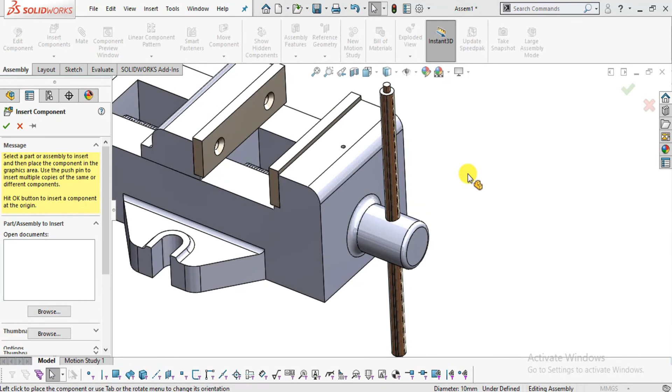Now insert the handle cap, this one like this. Now select this surface, click here mate. Now select the inside surface of this ball, make them concentric. Now I will add one more relation. I will insert this end surface and this one, make them coincident. Sorry, let me clear section and drag it like this.

Now select this face, click here mate and select the inside face, this one, and make them coincident like this and click here OK. Now right click on this handle cap and select here copy with mates. Now click on this arrow. Now it is asking for the concentric surface.

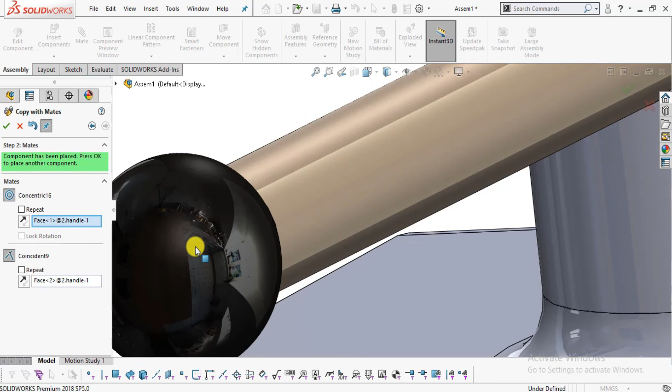Select this surface and coincident with this one. You can see like this. Now click here OK. Now exit this copy with mates command. Now you can see. Let me lock this position. Select here the surface and mate and lock this with respect to this one. You can see now our inside handle will not move.

Now we have to... Now I will add one screw mate so that when I move my jaw, or you can say when I move my screw rod, my jaw moves. For that, let me drag this movable jaw to here. Now go to mate section and expand this mechanical mate, and under this section select here screw. Now here enter the value of 0.1.

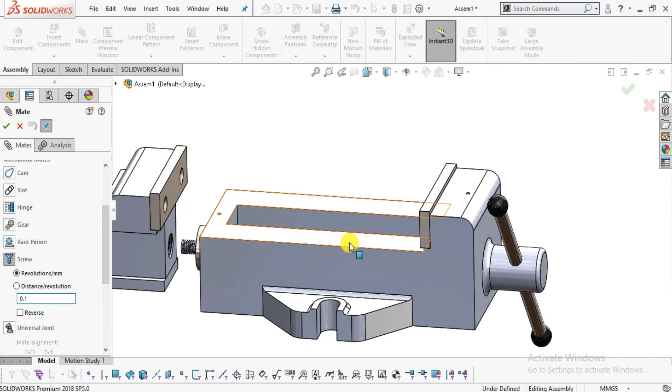Now we have to specify the components. Now select this face, this one, like this, and here also select this inside face.

Now enter the value of 0.1 and click OK. Now you can see when it is successfully added, when I rotate my handle, my jaw rotates, but you can see it is rotating beyond this cutout. So what if I want to limit its path so that it cannot move beyond this and this? For that, let me add one temporary mate so that I can calculate the maximum distance between these two plates.

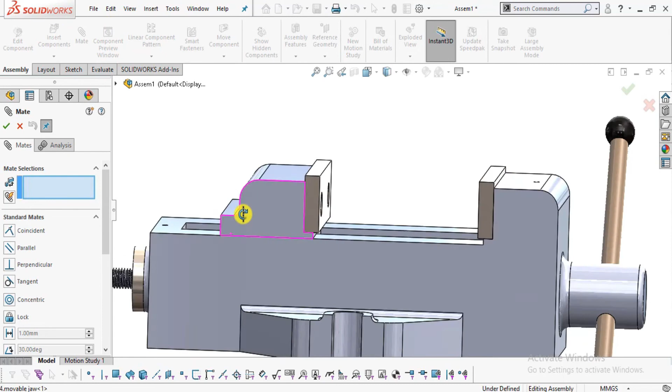For that, select the mate command and select this face and this face. This is a temporary mate which I am making. Now select coincident and click OK. Now go to evaluate, select measure, select these two faces. You can see their normal distance is 109 mm.

Now I will expand this mate section and delete the recent mate which I just created. Now again go to the mate section, expand advanced mate and click distance mate. When you click here, select this face and this face. You can see now I want to add some limit to this mate. For the maximum section, the maximum value will be 109 mm between these two faces, and minimum distance I want to be 0 mm. Now click OK.

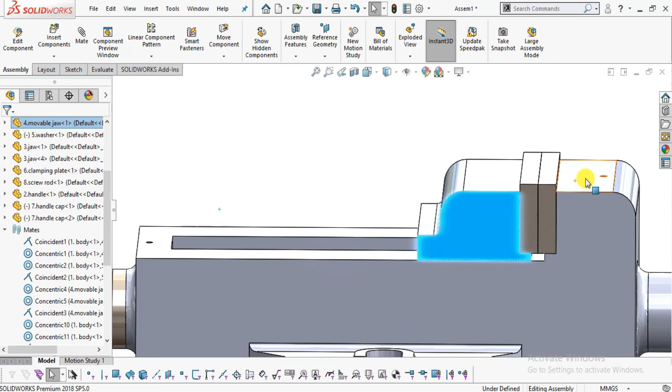Now let me exit this mate command. Now you can see when I move this movable jaw, it cannot go beyond this cutout, and here it cannot go beyond this plate. So with the help of limit mate, we can easily constrain the length or path of any component. Now you can see if I rotate my handle like this, I can easily move my jaw.

Now we will import some other components from the design library. For that, click design library and click toolbox. Now click add in toolbox. Now click ANSI Metric and nuts. Select hex nuts. Now we will add 2 nuts. First select this hex jam nut, drag this and select this face. It will automatically detect the size.

M10. Now click on this check mark. Now press escape or drag this up to here. Later on I will add a constraint relationship between all of them. Now again select and drag this nut, heavy hex nut. Now it has automatically selected the size M12. Now click OK.

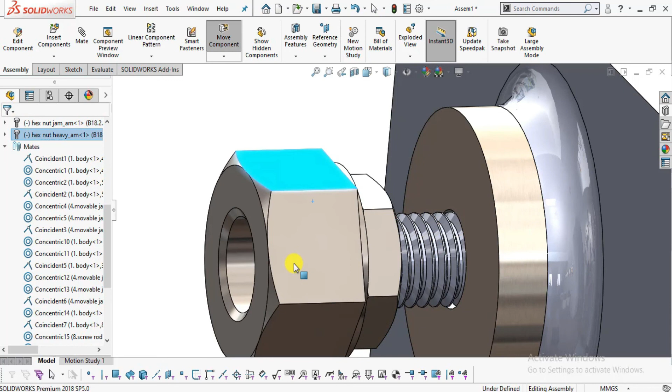Now escape key. Now select your mate command. Select this face and this face, make them coincident. Now select this face and this face, make them coincident. It looks like it has got some default relation. Delete these two relations.

Now select this face, select your mate command and select this face, make them coincident, click OK. Now select this face and this face, make them coincident like this. Now we will add a screw to all these 6 holes. 4 of them are here, these, and 2 of them are below.

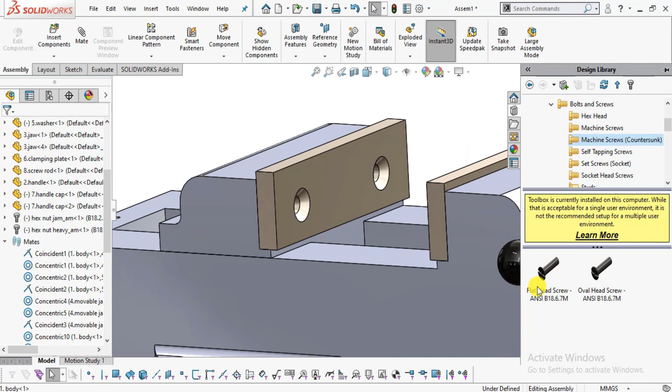Now go again to the design library. Now click back again. Now select, go under the bolt and screw section. Select machine screws and drag this flathead screw. It is automatically detected the size. Now click OK. Now again drag this up to this countersunk face.

Click. Again select this surface. Again select this surface. Now 2 of them are below. Select this surface and this one. Now press the escape key.

Now you can see we have assembled all our parts. Now let me add some appearances. Now select these two, like this.

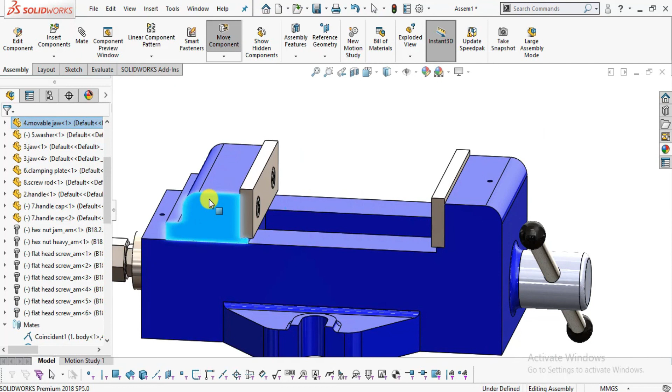Now suppose I want to animate this motion and save that motion. For that I have to select motion study and expand this section like this. Let me put it to the proper position, like this. Now expand this and first right click on this and click disable playback of view keys and disable view key creation.

Now drag this timeline up to 4 seconds like this. Now at 4 seconds I want this movable jaw in this position. Now again select this timeline, drag it up, it looks like it is calculating, drag it up to 8 seconds, and after the 8th second I want this jaw to be at the initial position like this.

Now you can see keys are created. Now if I play these keys like this, you can see it is calculating.

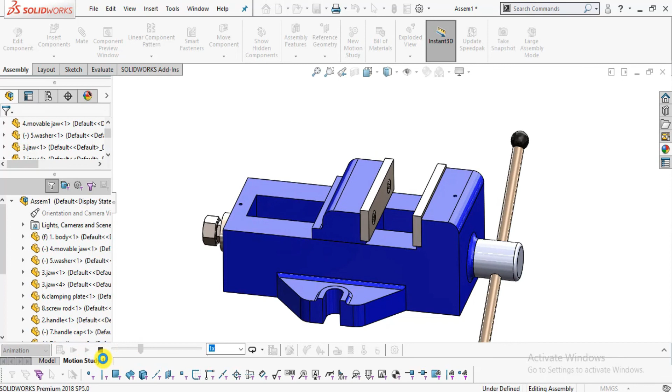Now suppose if you want to save this animation, all you have to do is click on save animation and enter the name, select AVI file format and select 16:9 like this, select entire animation, enter the frame rate and click save, select full frames uncompressed and click OK. It will calculate after clicking OK and will be automatically saved. I am not saving now because I had already saved this animation.

Now in this way we can create this machine vise assembly.